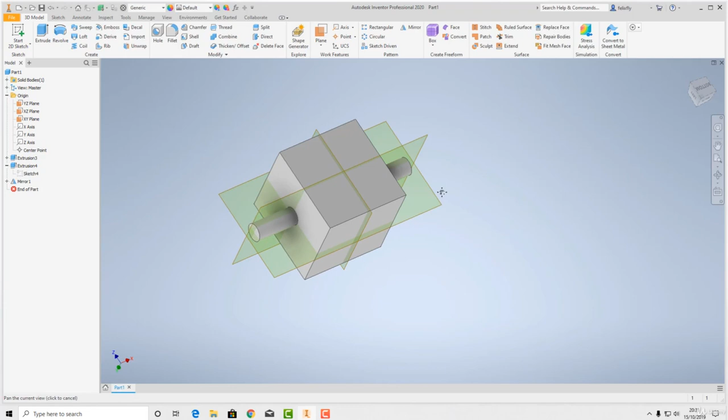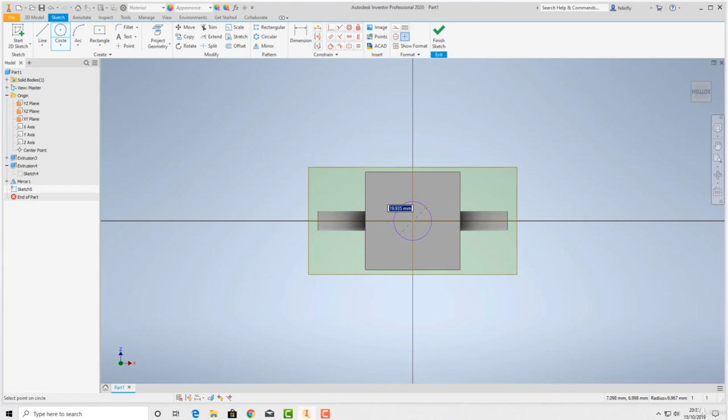We're going to look at it a bit more now, and what we're going to do is another sketch. We're going to click onto the top plane, so you click your sketch and click the plane, the top of the cube, and it will look down onto the top of this cube where we're going to do our next sketch. So this one, we're going to do another circle, and again we're going to snap to the center, and I'm going to make this 20 diameter. We'll click Finish Sketch.

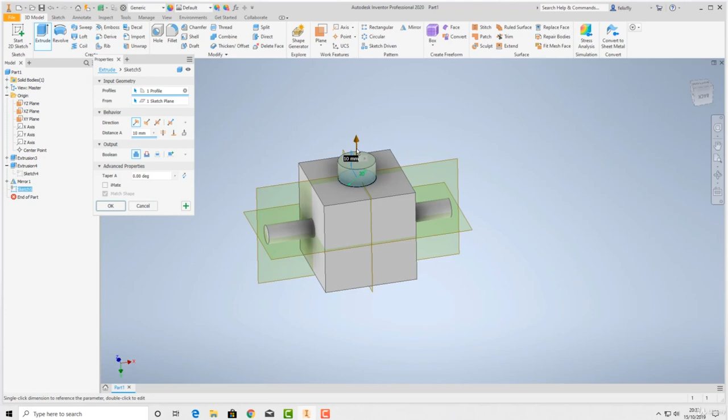And I'm going to click Extrude. What I'm going to do is put a hole all the way through. So as before, it's guessed the correct sketch for the circle. It's guessing we want to extrude it out 10 millimeters, but we actually want to cut into it. In my case, it's flipped it the right way. If not, you want to toggle these until it's going the right way inside the cube.

We want to go through everything. We want the hole to come out the other side, so you're probably guessing that's 50 mil. Our cube is 50 mil, so we want to go 50 mil. Let me type that in - 50, and that's going to drop us right away.

But suppose you wasn't quite sure if this was a complex part, you couldn't remember how much it needed to go through. You can just click this button here, which will say through all, and that will basically go through everything. It will come out the other side of whatever's there, no matter what size it is.

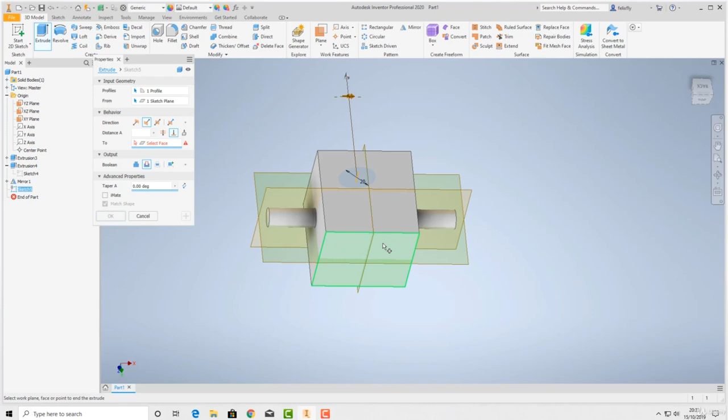You could also click 'to', in which case it will say to which face. You could revolve around using Shift and your middle wheel and say I want to go through to that face, and now it will go through. So any of those do pretty much the same thing - through all will go through whatever geometry was there.

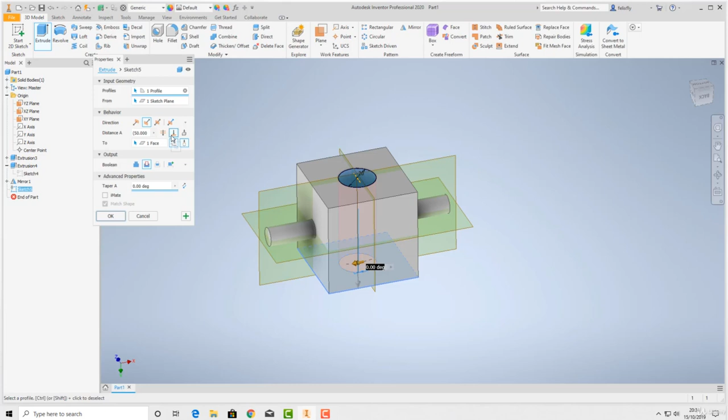Through all is good to use if you know this hole really has to go through everything. You use that, you use face, or you type in your dimension if you know it. These things are up to you - pretty much on a case-by-case basis, whatever's easier at the time. It will achieve the same result.

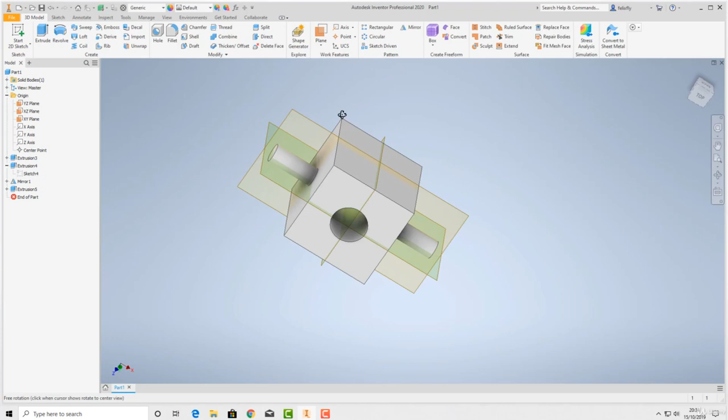If we click OK, it gives us this. If we zoom around with Shift and middle wheel again, we can see there is a hole all the way through this. So that's one way to create a hole.

There is actually a hole command you'll see here, which is a bit more complicated, and we'll go over that. There'll be a chapter just about holes later, but for now this was a basic extrusion through there, and this didn't need to be a circle - this could have been any shape whatsoever.

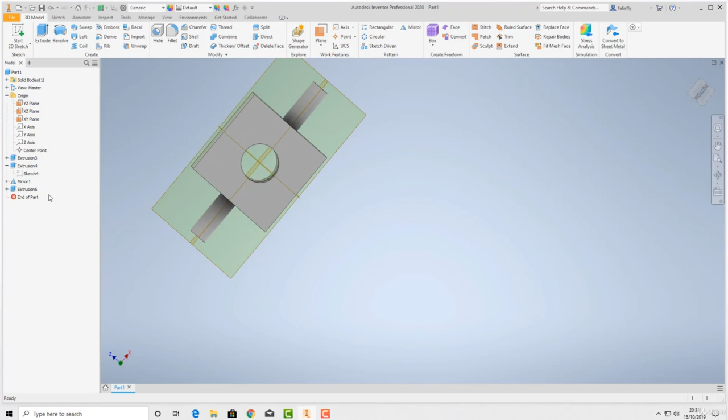If we go here, we can see it highlights in green. Let me just pan so we know we're talking about this extrusion. We can go on Sketch, right click, Edit Sketch.

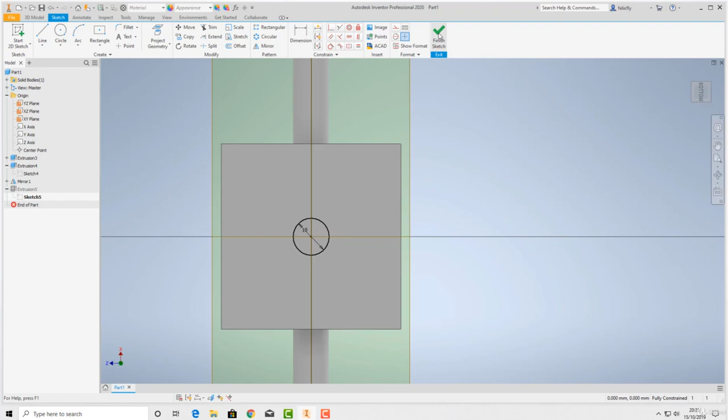We can change this now. Maybe we wanted it 10 millimeters. We can finish sketch and it will change it to 10 millimeters. What if someone said, actually I wanted this to be a square hole, not a round hole?

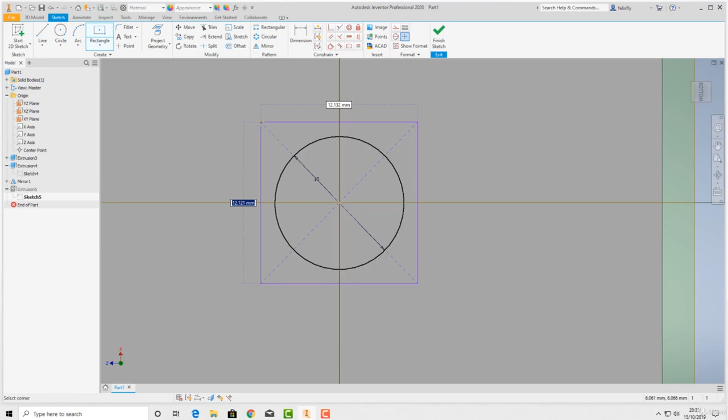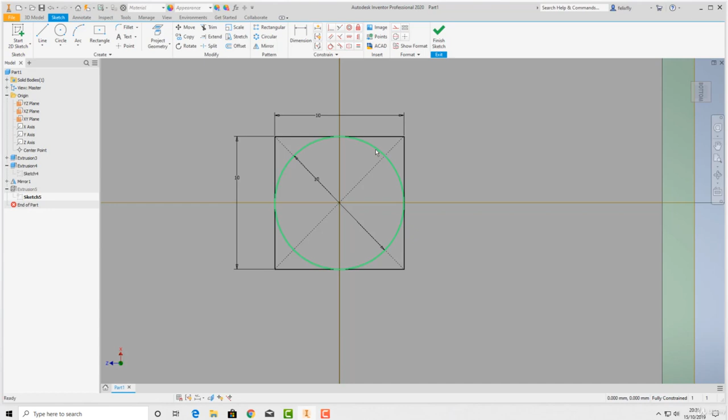We can right click, edit sketch, and go up to our rectangle here, our center point rectangle - we'll use that this time. We could type it in and tab across, or we could just draw it and put a dimension on. Maybe that's 10, and then click on the line, drop your dimension, 10. Our circle's still there, so we left click the circle and press the delete key. The circle's gone, and we finish our sketch.

Now Inventor's going to come up with an error here. What we've done - we didn't change the size of our circle in the sketch, we actually deleted it. We'd told Inventor at some point when we created our extruded hole, we selected the circle, and now we've deleted the circle. So Inventor's not just going to guess that we wanted to use the square instead - it's going to give us this error.

The easiest thing to do in this case is to just accept the error, and you'll see there's nothing there. And now our extrusion is red, and it's showing what it's looking for, or what it was when we created it, and it's got this warning sign.

This warning sign should alert you - you should not have any warning signs in any model. If you do, it's going to cause problems. Sometimes you could have this warning sign and think, oh well, the model looks okay, it's working okay. Believe me, you're asking for trouble if you don't resolve the issue that's causing this.

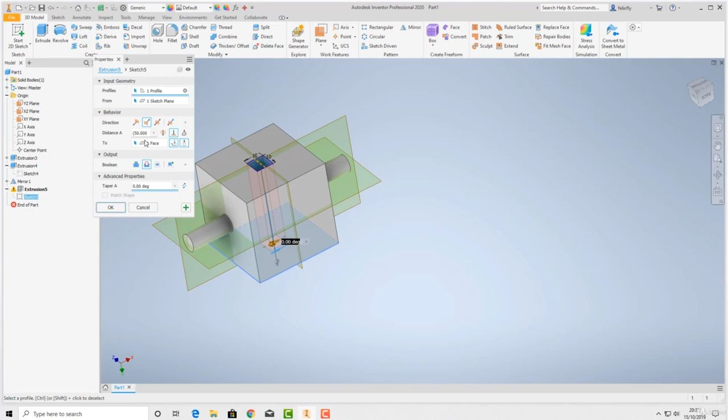So all we need to do in this case is right click, go to edit feature, and select the rectangular profile, and everything else can stay the same. We'll click OK, and there we have our hole.

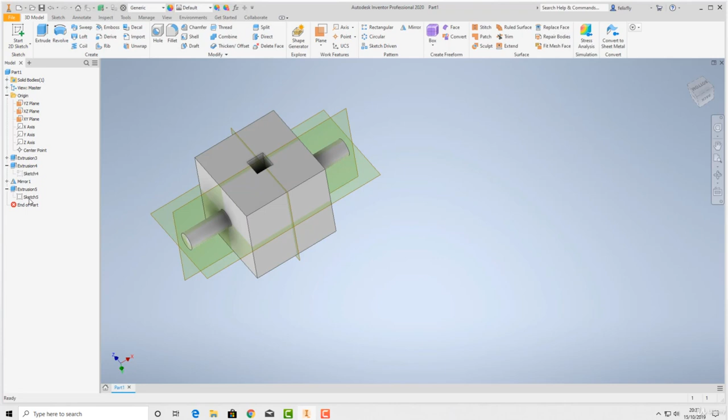So when you edit features and sketches, a lot of the time Inventor's going to guess, or it's going to update it automatically, but sometimes you do need to give it a bit of a helping hand, especially if you're deleting geometry. If we was to just pull that circle up to a different size or change the dimension of the circle, as long as the circle remained, it would have guessed that. But because we deleted the circle and replaced it, we did have to give it a helping hand - but it's easy to change.

And when you do get those kind of error messages, make sure you work through them as they come up. Don't get yourself in a situation where you end up with lots of unresolved errors - you then have to go through and work out, well, what caused this? I can't remember. It becomes a bit of a nightmare. So if you do get a warning or an error, resolve it there and then.

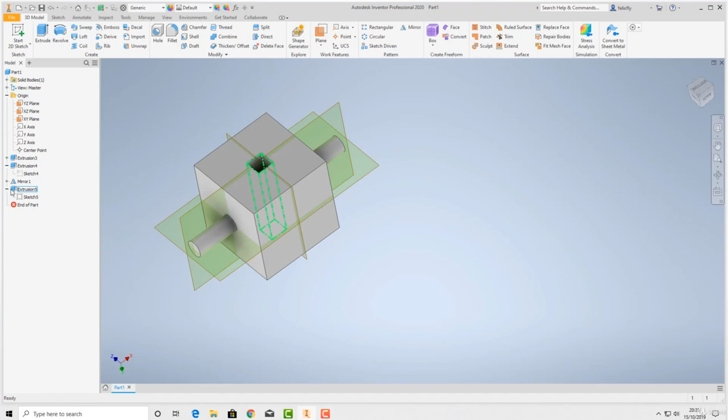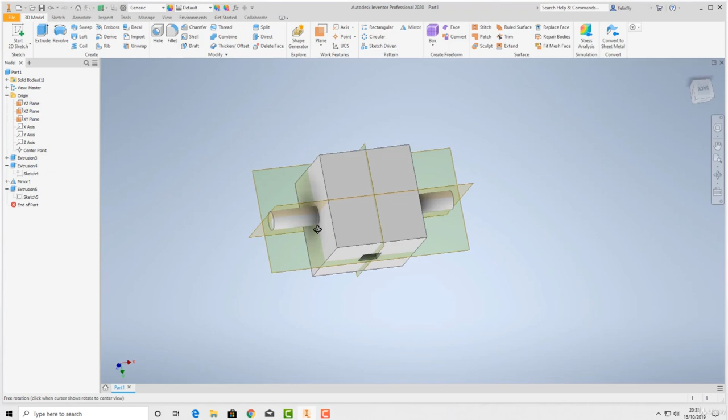But don't worry too much about those errors now - this is very early on in our course. I just wanted to show you that everything can pretty much be altered, including the shapes. So that was basic alteration. We're now going to look at some more advanced sketching in the next chapter.